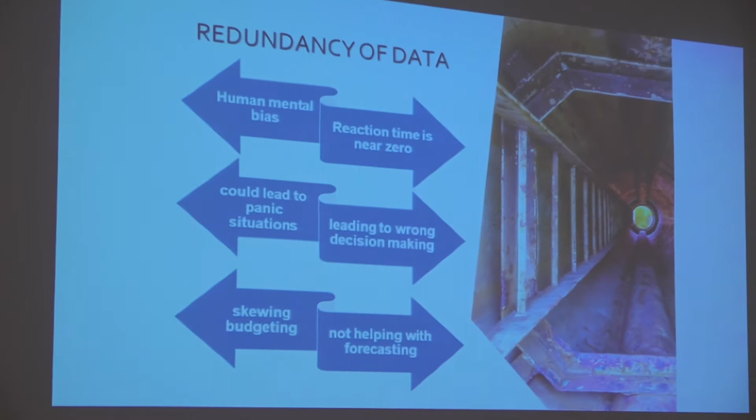So here we have redundancy of data. In what we are collecting, there is a human mental bias, like I mentioned, in everything that we do and everything that we collect. After we do that collection, the reaction time that you have is practically zero, which means from the moment you see a crack to the time your mind starts thinking there is a problem in this bridge, there are very few engineers who can actually say, just like the Nadi doctors we used to have, who used to check your pulse and say, okay, you've probably got a heart disease or sugar or whatever. There are very few engineers who can look at a structure and say that this is the problem.

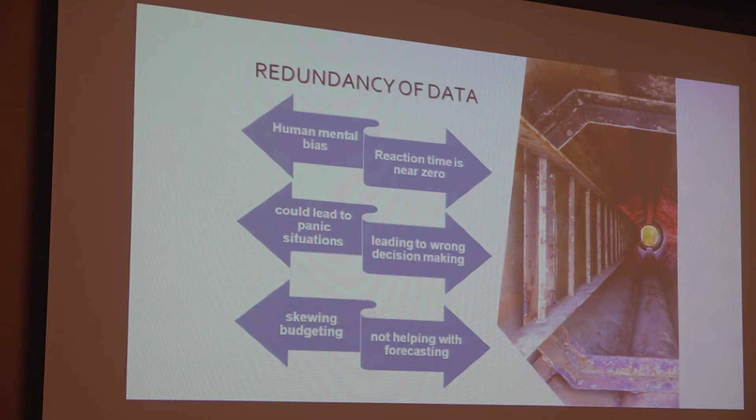Most engineers will react and create a panic situation, which is what you're probably seeing on ground when the Mumbai Municipal Corporation is closing down 35 bridges overnight. Probably 3, 5, 10, 20 of those bridges are really in a panic situation, but not all of them can be in the same situation one fine day. That's not possible, right? That's the most obvious logical solution to a problem. And like I said, it leads to a panic situation.

Obviously leading to wrong decision making, which means you close down the structure, you close down the bridges, you evacuate dilapidated buildings, you stop production in an industrial structure, just because one human mind decided that the structure is dilapidated, without any basis of balanced life. It obviously skews budgets, and it's not helping with forecasting, because we are not forecasting anything at this moment. We are not drawing conclusions from all the data that we have, and we are definitely not creating budgets and forecasting based on that data, because that data is inadequate to do that.

Now, what do we need for balanced life assessment? There's inadequate data on locations. In most cases, what do I mean by this? It means that when you see a crack, most people come up with the notion that the structure is dilapidated, it's got a problem, there's corrosion, there's too much cracking, etc.

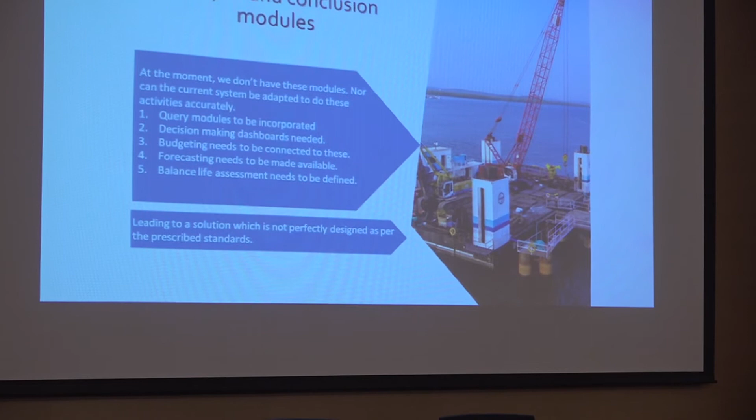We don't have a definition of balanced life assessment at this moment because we simply don't do balanced life assessments. It leads to a solution which is not perfectly designed as per prescribed standards. The standard that we have for bridge management systems was written way back in 91, 92. And when I say standards, the Indian Roads Congress Code and a special publication both. What we have in that tells you what analysis and conclusion module is needed. But we haven't done that yet. We have stopped after maybe about 20-25% of the work has been done.

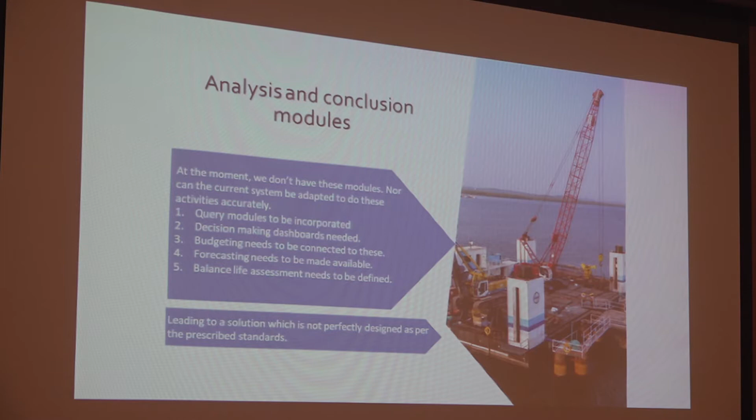So we have looked at the why. Why do we need to do what we have to do? What could we do? Well, for one, we could use structural integrity monitoring software. It's state of the art, there's no human interface needed, and it is scalable. Now, what do I mean by this? I'm going to show you in the next couple of slides, the second part of my presentation, what a structural integrity monitoring software does. But before I start talking about structural integrity monitoring software, you need to know in principle

what I'm talking about. Imagine a scenario where you could be monitoring every bridge that I just talked about, 700,000 or 800,000 bridges. You could monitor each and every span of each and every bridge sitting right here. That's what we are looking for. How could we do that? For that, we need state-of-the-art software, of course, because it's all digital. We need to reduce human interface. And of course, it has to be scalable. So all the three attributes that I mentioned need to be there in this system. What does this mean in simple terms?

Imagine that you could see on this screen a simple dashboard, just like you see in those traffic data centers. You see all the traffic moving, you see the traffic lights, you see where the problem is, you see where the clog is, and you can remove bottlenecks. You can have a dashboard which is telling you which particular span of which particular bridge is undergoing what stress at any given point in time. Now, why was all this not possible all these years? Why could we not do this all these years? What I'm saying is very, very easy to do. You just put CCTV cameras and do this. For two things. One, we did not have the technology to do it. And two, we didn't have adequate computing power to do it.

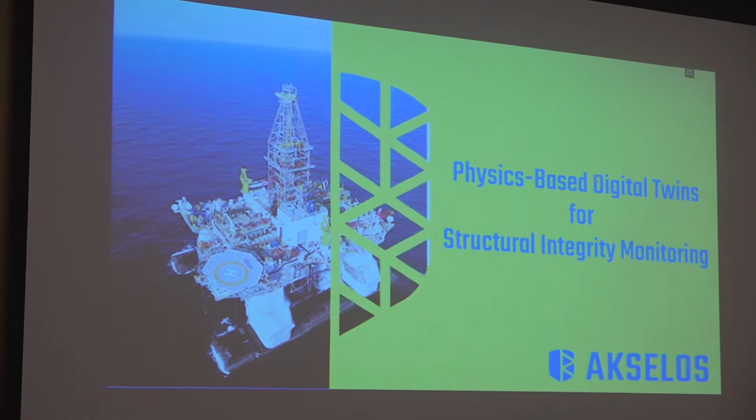So from simple IBMS, I'm now moving to what's called digital twins. What this does, it creates a complete twin on your computer. At this moment, this software is being used to monitor offshore platforms. And why offshore platforms, you might ask, is because this software was originally developed in MIT by 3 PhD students. This was their PhD program, almost 15 years back.

But for the first 10 years, because their research was funded by the US Department of Defense, they were obliged to use the software only for defense purposes, for strategic installations. So for the first 10 years of its life, this software was tested on US Department of Defense installations, and some of those were offshore installations. So the first application of this software in the civilian industry over the last 2-3 years has been in the offshore industry. It's only the first time that we are trying to think of ways and means of using it for bridges and structures.

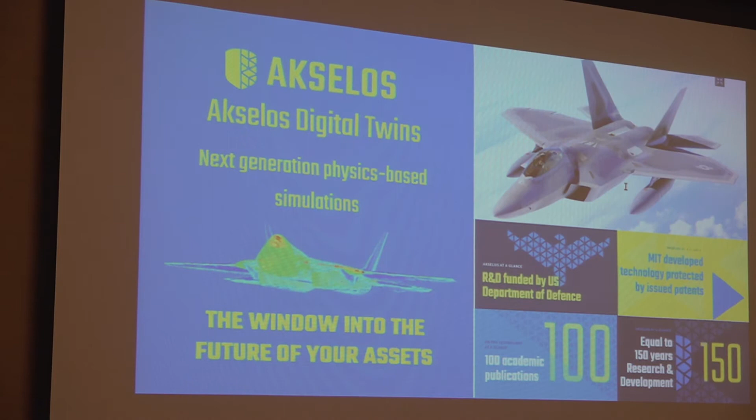So it's the next generation physics-based simulation. What you see on the right is the Lockheed jet, and on the left, the simulation of the same jet. Imagine a finite element run that you would do on the same jet, and you see the finite element analysis on the left. That's an application in aerospace engineering. The R&D was funded by the US Department of Defense. MIT developed the technology, protected by issued patents. It's got over 100 academic publications already, and it's equal to 150 years of research and development.

So how can you understand how a structure will perform with particular regard to all these stresses and deflections, fatigue life, natural frequencies, mode shapes, vibration response, shock impact damage, temperature distributions, and modifications or upgrades? Now this is where I'm saying that we are moving away from the manual collection of data. You are now moving to digital collection of data.

So all we need to do for this software to analyze all this is to attach certain attributes to the structure. Attributes in the sense a strain gauge, an accelerometer, or the like. You could attach anything that measures data of the structure. It could be brought back to the software model, the digital twin that's created. And the twin, based on the data that you're collecting, will recalibrate its own model and send back to you conclusions that you can use in real time.

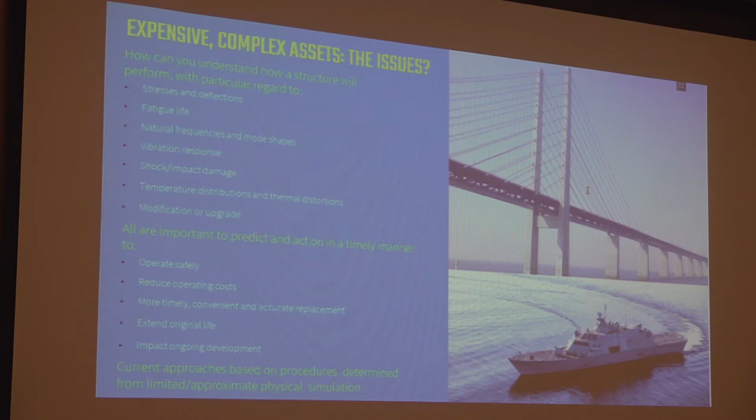So imagine this being done on a real-time basis, which means that I'm getting deflection, I'm getting strain, it's calculating in the background, and on my screen, all I'm seeing is that there is a band of top strain, top stress, top deflection, bottom deflection, and I'm seeing a graph which says that I'm in the safe zone. The moment it goes either below or above my safe zone, it will press panic buttons to say that now you need to inspect the structure. And this is where something is going wrong.

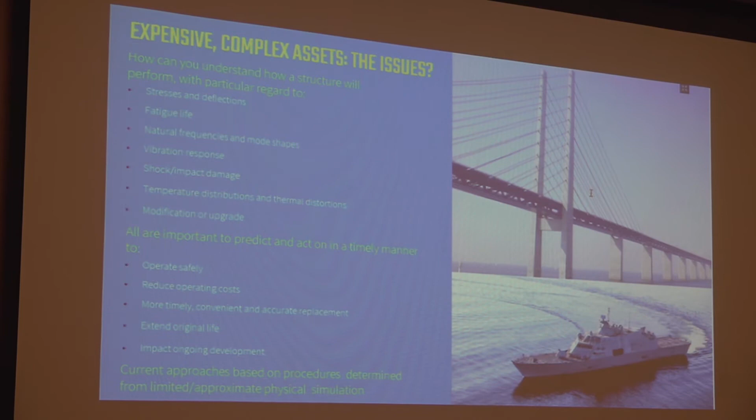Because it's a finite element model, it will be able to tell you, with maybe 95% accuracy, 10% of the locations where this could have gone wrong. So you need to inspect only those 10% locations. You don't need to inspect the entire bridge to find out what's going wrong. That's the bottom line. Okay, all this English that I'm telling you is leading to that.

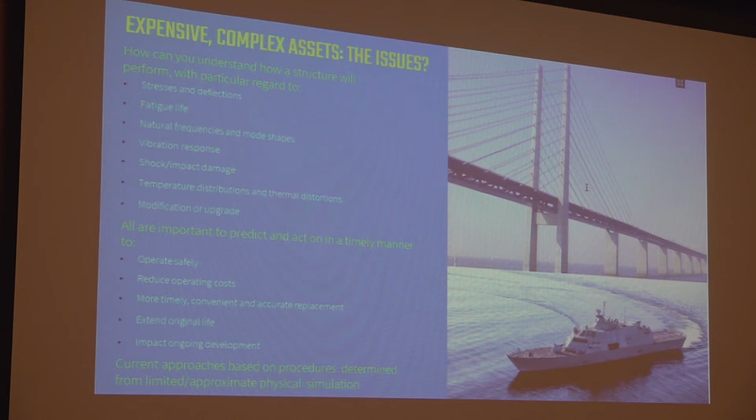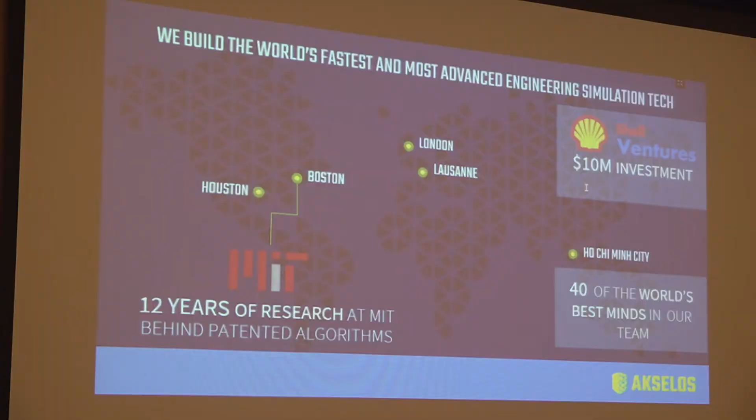But yes, so how is this technology different from the current level of technology that civil engineers are using? Remember, I keep repeating civil engineers and structural engineers because this is not currently being used in the civil engineering industry. This is being used more in the aerospace, more in the floating offshore platforms, and so on and so forth. That's why you'll see the large boats, etc., in these models. There you'll see port structures at the bottom.

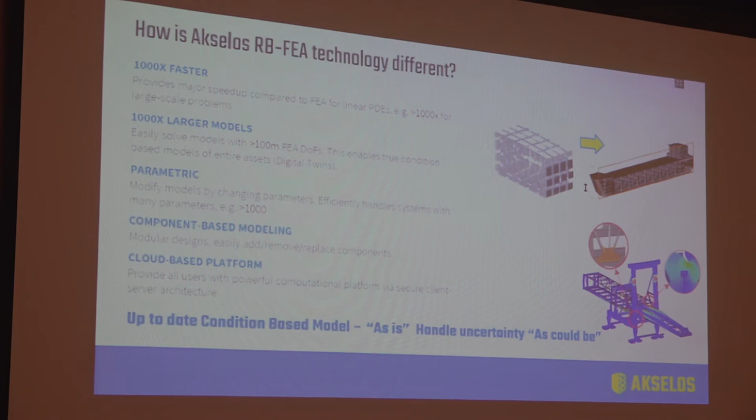That's a crane, and you can see the finite element modeling that has been done. This entire boat, the finite element modeling has been done, and like I said, easily solvable models are with more than 100 million finite element degrees of freedom. This was unthinkable till we got a software like this.

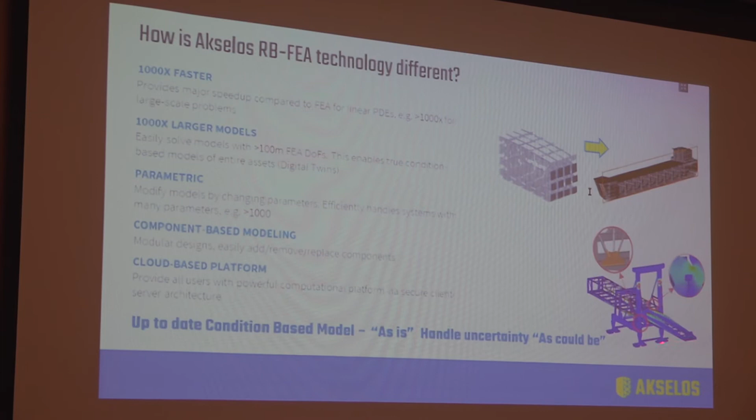So this is parametric modeling. What does parametric modeling mean, and I talked about scalable software. What it means is that, let's say you have modeled for this particular structure a joint like this. And you come across another bridge or another structure where you have the same joint. You don't have to recreate the joint. You don't have to resolve the finite element model. It stores the joints as parameters.

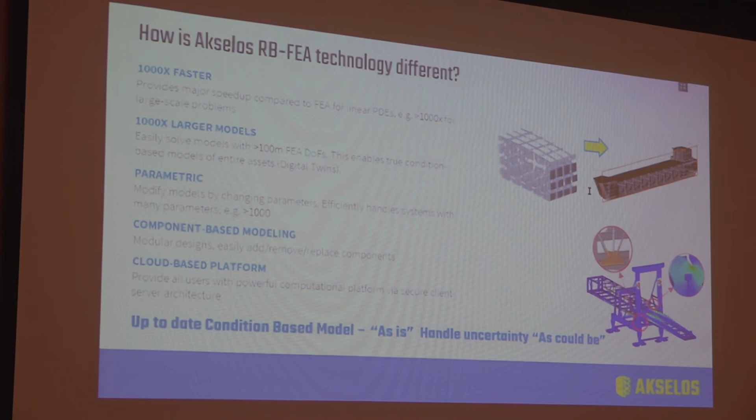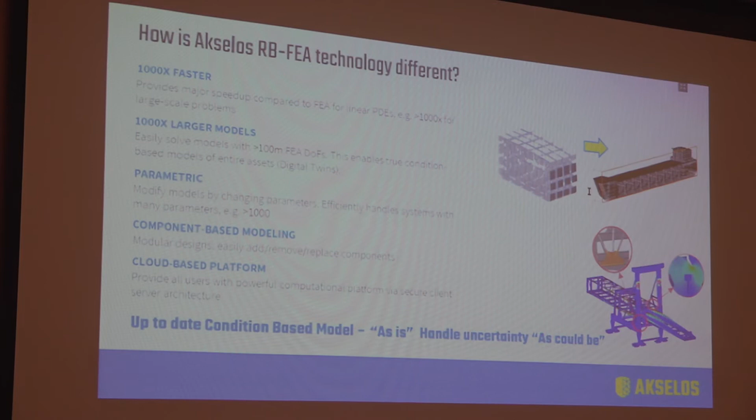Now, remember the way that this is being done is completely different from the way that we do it currently. In your current models that you do in your office, if you find that in your building, your column is out by say 100 millimeters, the way that you would model is to redo the entire model, because just moving a column by 100 millimeters doesn't work. And you have to redo the entire analysis again, look at all the members again, and do everything again. That takes a lot of time. This doesn't require you to do that.

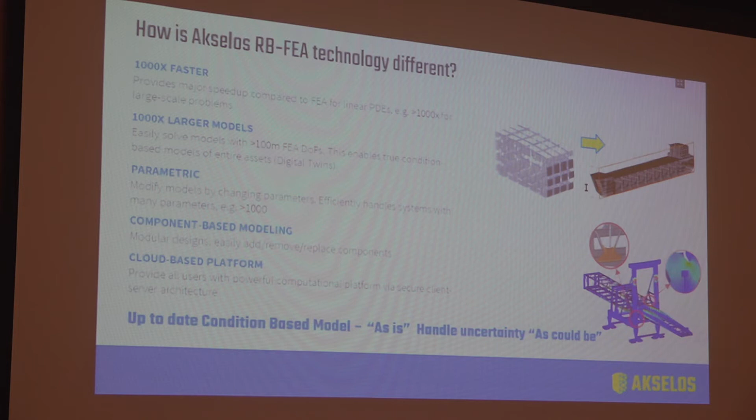For example, I go to this structure and I find that this particular beam is out of its line. I just need to change that one beam. And even as you change the beam and click solve, within seconds it tells you what's wrong with this. A normal finite element model with this kind of degrees of freedom takes hours to solve. This does it in microseconds. That's the big difference in computing power and algorithms that are cloud-based.

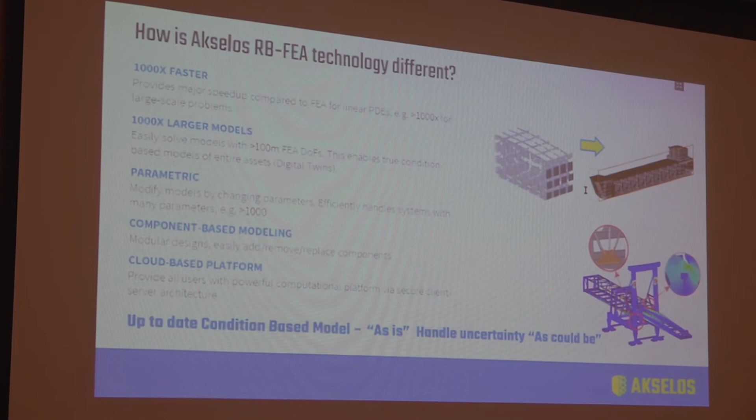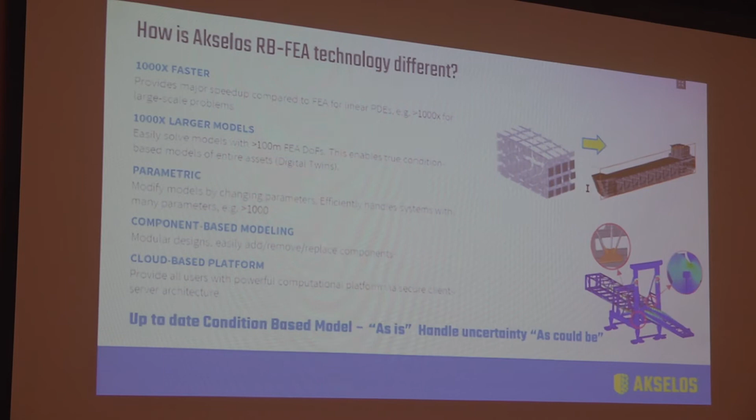It's got component-based modeling also, which means you can do modular design, which means you've designed a truss for one structure. You have a similar truss elsewhere. You don't need to resolve it. You just need to modify that existing structure, and it will solve that based on component-based modeling.

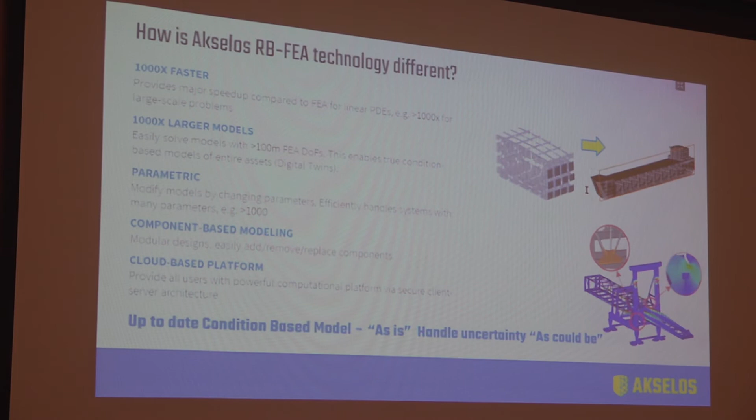This is what they're currently using it for. Some of the applications that I talked about: they do wind turbines. You see the stress pattern on the wind turbines. They do pressure vessels. They do rotating machinery, which means gears. They do fixed structures, which is steel structures essentially, and they do floating structures.

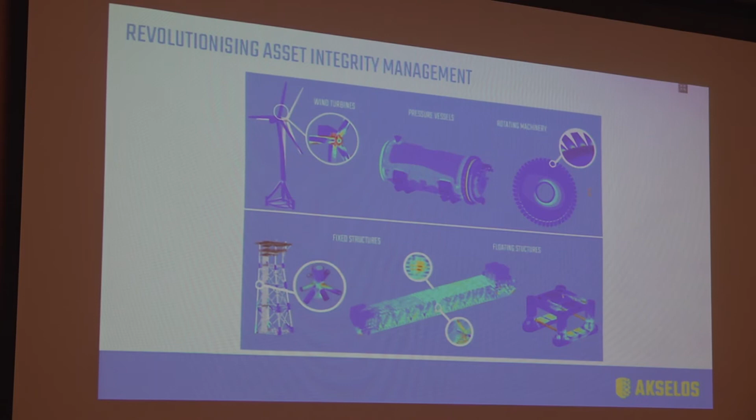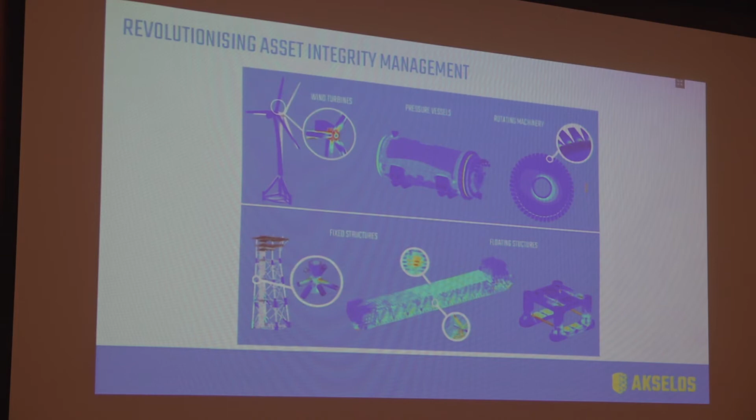Now, one of the most amazing applications I found, which is not related to civil engineering, they also simulate the human heart. The software simulates the heart, and you will be amazed to know what they use it for. Most of the drugs that are used need to go through a phase of what is called clinical trials, which means you try it on rats, then you try it on monkeys, then you try it on human beings. That's the series of clinical trials.

But because of large issues with animal rights and things like that, there's a problem in getting rats and monkeys and making trials on them. So what they do is they have found that certain drugs give electromechanical signals to certain nerves of the heart. So they have mapped those electromechanical signals of your drug. All you need to do is come up with your drug and say that this is the electromechanical signal that I need to give the heart and see how the heart reacts. They use this software to see how the heart reacts to certain electromechanical signals.

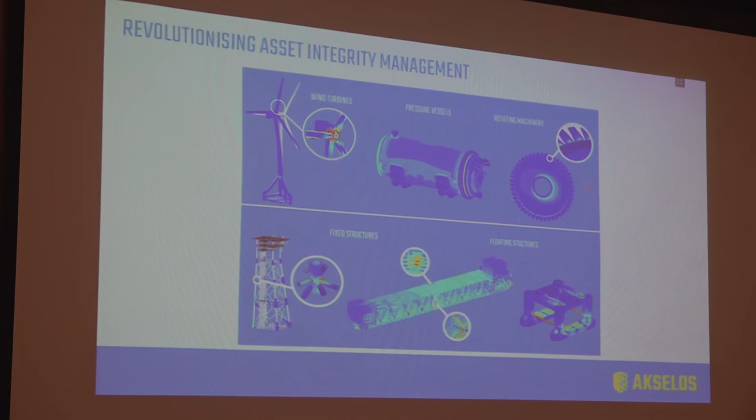They also map the brain, and that gets scary. That's where it starts getting into domains which are scary. And they can actually control your brain with electromechanical signals. You might have seen Google with a helmet, where if you turn your head, they know which direction you're looking at, and your Google Maps actually shows you which direction you're going. So that's an application of a software like this. The heart of decision making is a software like this.

But of course, they don't use this software for brains yet. There's another software that does that, but they're using this for hearts, and they're using it for modeling stents to see which material of stent has a longer life, fatigue life within the body, and it's really amazing. I've seen it myself, and sometimes it scares you.

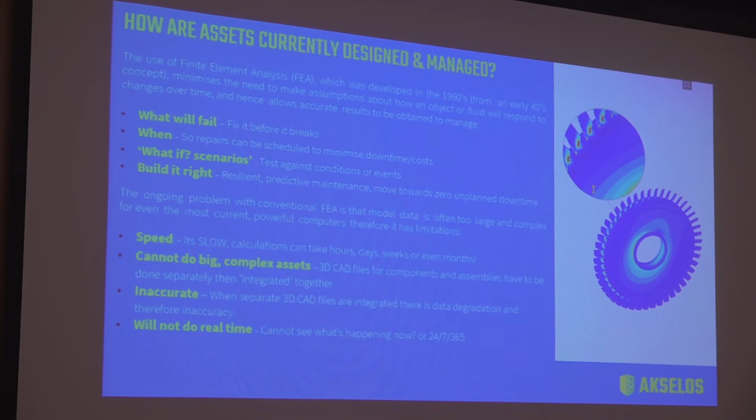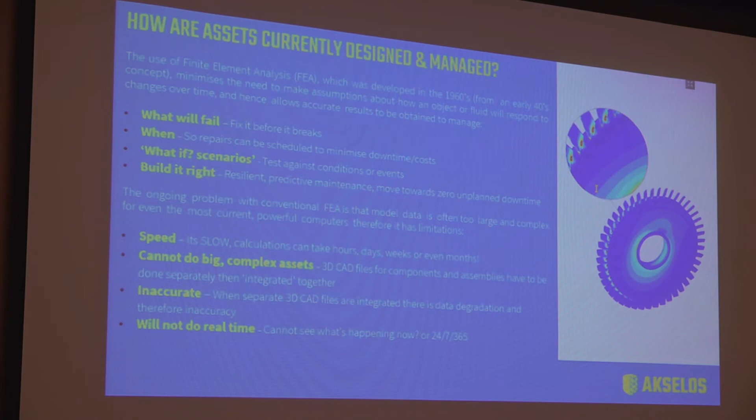You could model the bridge and say, what if this particular member, instead of being like this, is like that? What happens if a bolt is loose? What happens if the splice plate is not fitted properly? What happens if the weld fails, and so on? So you could do what if scenarios.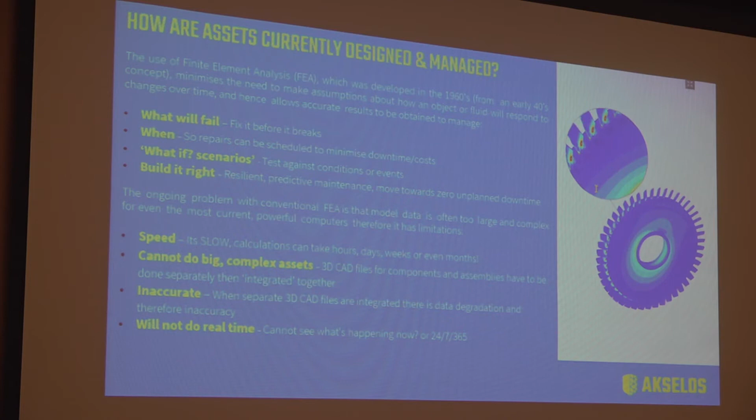Build it right, which means that if you incorporate this early enough in your project, you could actually monitor the asset as it is being built, which means that even during the construction phase of the model, you could be getting real-time data and trying to see if there's something wrong that's going on.

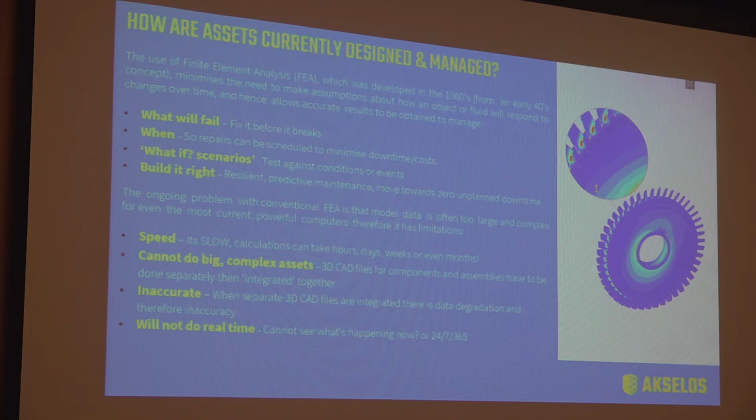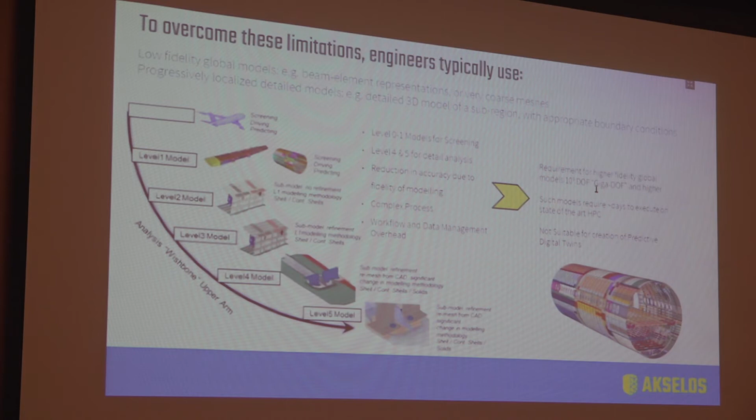Of course, I've already talked about this. Speed cannot do big complex assets, is inaccurate, and will not do real-time in most cases. So to overcome these limitations, engineers typically use, I've already talked about this, what we do, how we do quality checks on this, etc., and then what we want to do in the future. And this is, in pictorial terms, what I just told you.

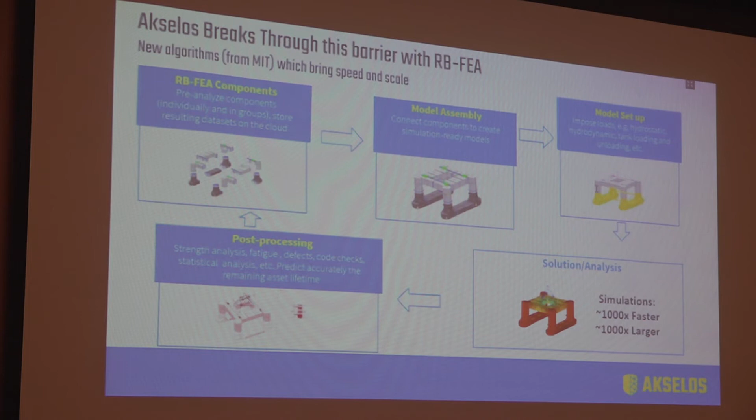This is the parametric and material models. You could pre-analyze components and keep them ready. You could create a library of model components and keep it ready and simply plug in those components when you're creating a model. Connect components to create simulation-ready models, model the setup, solution and analysis, and then post-processing, and then go back and do the cycle again till you get a result that's absolutely perfect and matching with your structure on the ground. So that's the digital twinning that's happening.

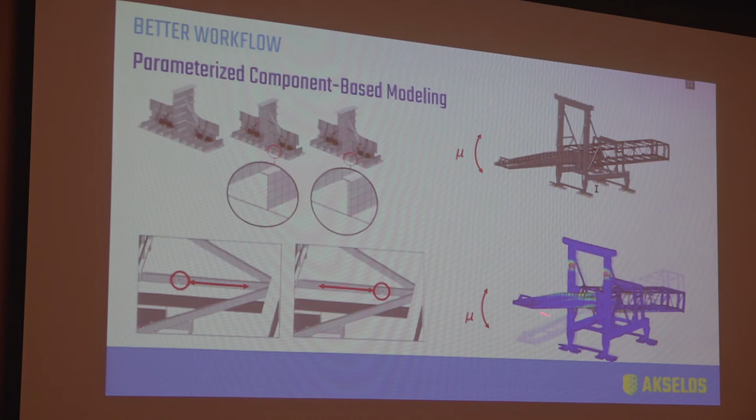So here you see one more example of the parametric component modeling, and you see the level at which the finite elements is happening. The whole structure that you see here is actually modeled right down to this. You see the tear here that's induced. You could move this from here to there to see what happens if that tear has happened. And you could move the structure up and down to see what happens. You see the stress concentrations at locations. You could do all kinds of what-if analysis, which you're not able to do currently.

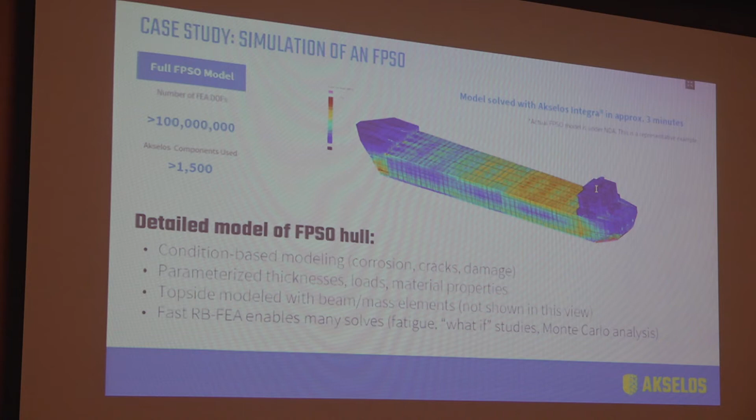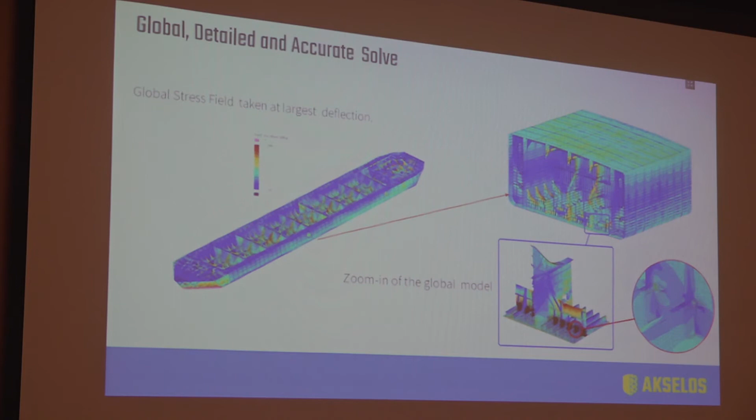Again, you see the level of detail on the structure. You can see the finite elements that's done. So from this, you can go to that, from that to this, and down to the exact bolt and nut. You can actually check each and every component of your structure. So you can induce cracks. You can check what happens if a crack were to happen on a hull of a ship, and you could see where the stress concentrations are, and so on.

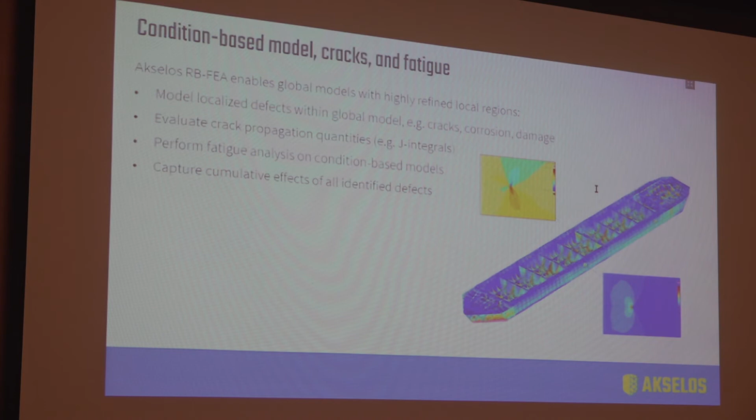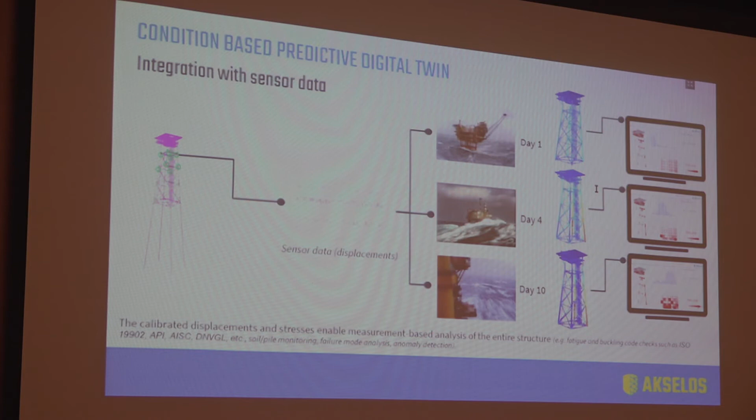So I can keep talking about what they do also in different kinds of models, but these are mostly, like I said, not in the civil engineering domain. Well, okay, here's the offshore platform modeling, and you can see day 1, day 4, day 10, the sensor data displacements. You can see the actual data that they have. I've seen them get data from the wave patterns, from the wind pressures. They measure the wind, they measure the waves, direction of the waves, the high tide levels, the low tide levels, everything. Practically everything is monitored.

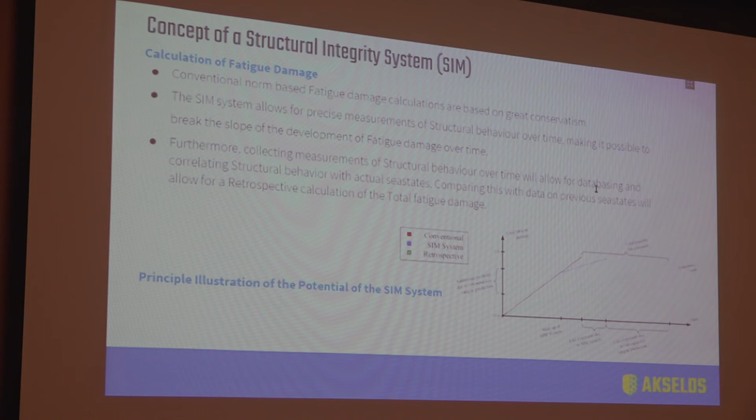So this is the future of even this software. I'm already calling Akselos the future, but this is the future of this software. It's now being connected to artificial intelligence and machine learning, which means that if I have a truss bridge and I have enough data generated over, let's say, 1 year or 2 years, and I've connected that to the conclusion and query model, which tells me what was going wrong when this particular stress level exceeded on that bridge, it will start learning from the answers that I'm giving it, and the next time that happens, it will tell you that this is what has gone wrong. So you don't need to tell that story again.

So it's got predictive life assessment and predictive failure models built into it. This development is going on at this moment, even as we speak, and it is expected that by fall next year, which means about August or September, around the same time this year, Akselos will introduce machine learning and artificial intelligence into the game, which means that the first problem that I mentioned, the human data extraction limitation, will be overcome.

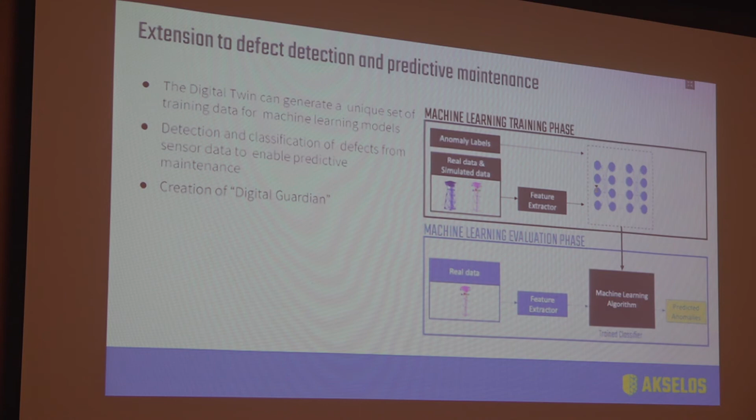You will not need a human interface to actually go and physically inspect anything until the model tells you that there is something really going wrong. You need to inspect the bridge, and then you could go and inspect a specific span or a specific area of a particular bridge. Even today, when we do, let's say, a structural audit or we do inspections of bridges, it's impossible physically to inspect every square millimeter of the structure. It's practically impossible. So we are getting there slowly.

So the potential extension to structural health monitoring, I already mentioned this. So in summary, it's large-scale models, hundreds of millions of degrees of freedom. Step change in performance is almost 1,000 times faster than the current FEA that we do. It's parametric, it's sensor connected and controlled, both. And you do structural health monitoring online.

So this, ladies and gentlemen, is the future of structural integrity monitoring and management as I see it. Software like this, and this is just one particular software. I have seen at least 3 or 4 like these, but each one has its own pluses and minuses. You could weigh the options before you take a call on what's best for your structure. But this is just one I thought, which I've seen very closely.

In fact, we are one of the contributors to the reinforced concrete, pre-stressed concrete and steel bridges module of the artificial intelligence and machine learning that will be introduced next year. So we are contributing towards making that a foolproof software. So next year, hopefully, when Akselos introduces this particular module, it will shortcut a lot of those problems that I mentioned. The flip side of this is that, unfortunately, it will also replace a large number of engineers who are going down to the inspection level and coming back with data.